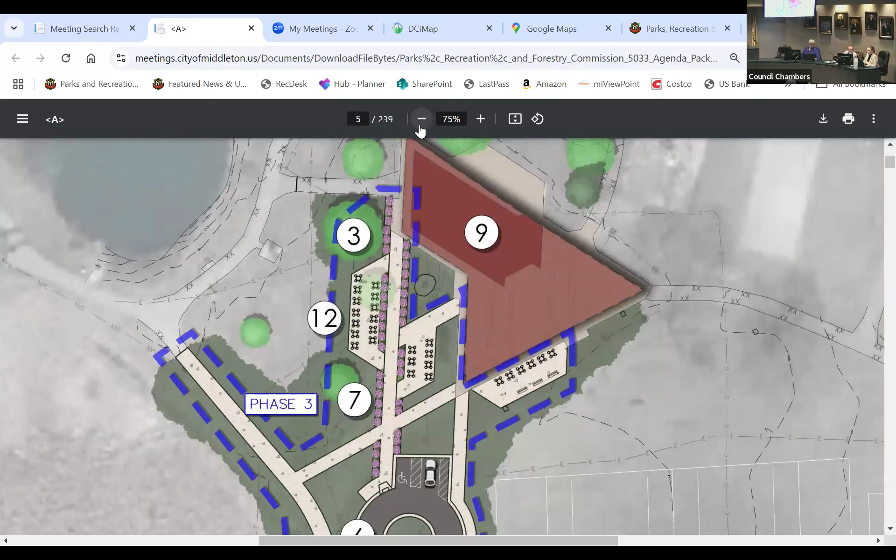And the timeline for this project, we can go through as well. So Rettler has been going and doing surveying and several studies and assessments on this site—I should bring this up for you guys to look at while we're going here—but they have reviewed and been assessing this entire site in the outlined area, which they will go over a little bit further. That's been taking place over the last few months to gather data.

We've also just opened up a public input form online. I hope some of you have seen that. That input form is going to be open until November 11th. Once all the data is gathered, I will send it out to the Park and Rec Board before our next meeting, along with any adjustments to the concept plan you guys are looking at tonight. But tonight is mostly presentation, initial review, and any feedback to Rettler and staff for direction we may want to go with this site.

It's broken up into three phases, which Lance will go through. We do have funds allocated in 2025 for tennis court reconstruction for that phase of the project, so we're planning on reconstructing those in 2025. The other pieces would be in future years when money is allocated to those phases of the project. So Lance can take it from here and run through this for you.

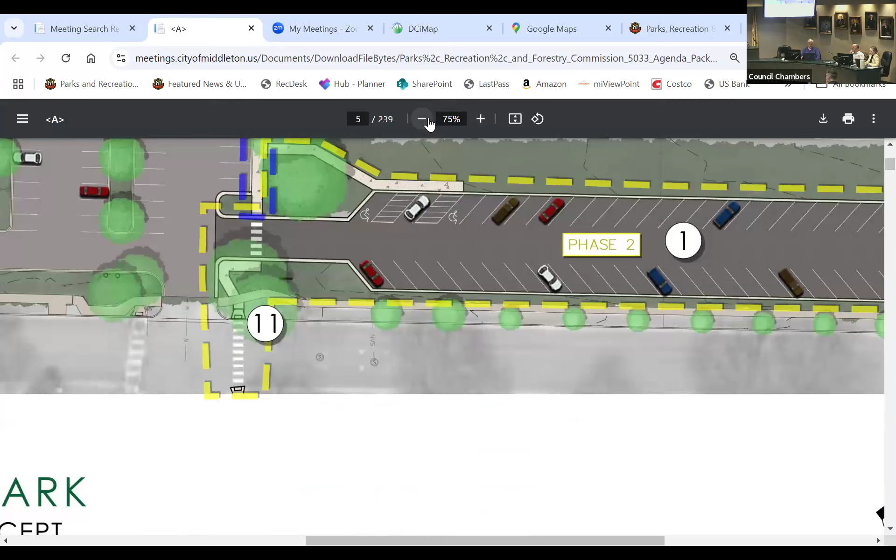I kind of wanted to know what the general thoughts were from over here about that extra parking space, because it sounds like what's already there isn't being used, but that corner is causing contention. I'm also not sure if that full field is being utilized as a rugby field. I don't think we have any rec rugby, so I don't know if it's the biggest concern to preserve that, but again, it doesn't sound like all of this is being used here.

We don't currently have enough space, the field is not big enough for rugby at this location. It might have been in previous years. I know there's tree plantings and that, but right now what we rent it out for is rec soccer and flag football heavily. We rent it out for other uses, but those are kind of our two main ones we want to be concerned with for field dimensions.

The flag football is kind of the bigger one, because when we do have soccer, they kind of just use it as an open field for skills and drills in this location. But we could look at that, we don't have any soccer nets out, it's more of a green space opening. If we do need to or want to look at having this field be utilized for something else, I can get the dimensions of what this would be, just so we can note that.

And then also, if in the future we need to look at any rugby usage—in my two years here, we haven't had anybody come forward with interest in rugby, but that doesn't mean it's not an interest in the community. We have our master plan coming up, where we'll want input like that if we want to see a rugby field in the future.

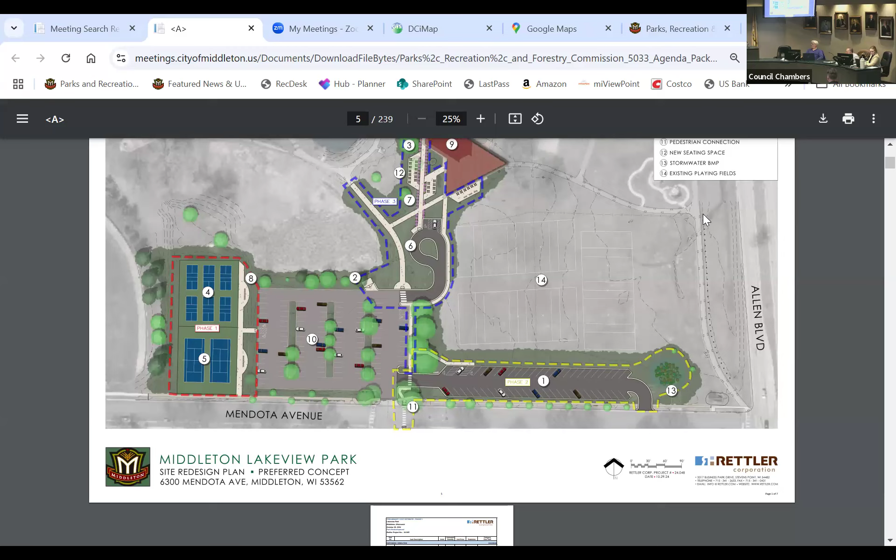All right, on to agenda item number three then. So we're going to talk about the preliminary plat for development for Veridian Homes off of High Street, or High Road. So Kylie, I'll let you kick us off with this one.

Yes, thank you. Oh, yes, you're welcome, thank you. The drive—no problem, sure. Yeah, you can set it right there. And then I'll let you guys share your screen in a moment. Okay. You're just nice. Okay, so the—

The Ziegler development here: Veridian Homes has submitted their preliminary plat for the Ziegler property development project. The Ziegler property is located between Graber Pond and Pheasant Branch Road, spanning 85 acres of land.

The proposed—we need to leave the door open. Sorry, they just shut the door. Oh, there is a door open over here though. Oh yeah, I didn't catch that. Normally this one's closed, but that's okay. Okay, sorry, sorry. No, Kylie, that's okay, that is an important matter.

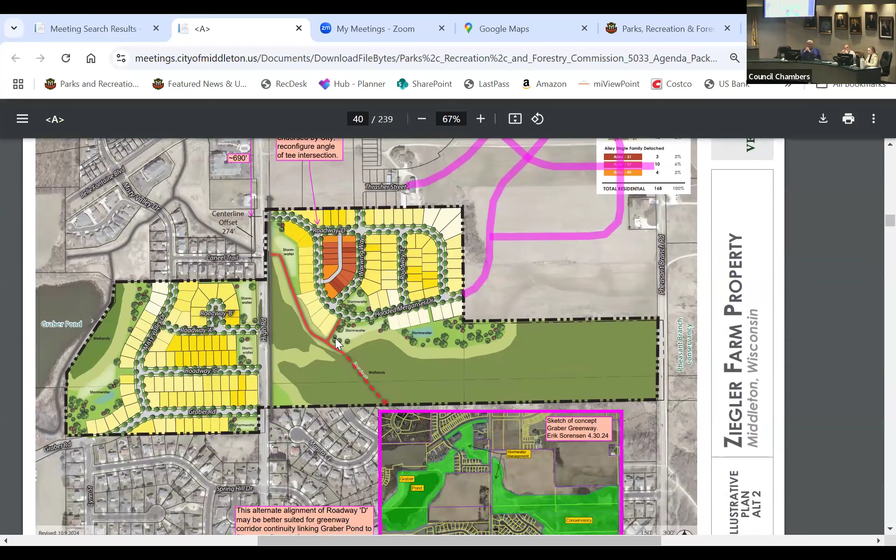So, did you guys need to look at a different map on there too? I'm just trying to look at, what is this map - the alternate plan, illustrative plan - that next to the park thing, trying to line them up. Okay, got it.

So there is coverage to this development with the surrounding parks. But I think a big shout out is that High Road runs through this development, and High Road is something that we don't always consider a safe walkable space across, a very busy road depending on the speed of traffic. So on the east end, there are really only 2 mini parks that provide a 10-minute walkability, versus on the west, without crossing High Road, you have 3 neighborhood parks and a mini park. So that's just something I'd like to note, that High Road is a barrier for people, and that walkability does decrease.

And then noting what's in each of these parks. These two parks have not been developed yet. That is on our plan for next year to develop. Those are brand new park spaces, so the amenities haven't been selected.

But this is Pheasant Branch Ridge Park. We have a playground and a green space. And then in this park here, we have, or wait, no, not a soccer field, a baseball field and a shelter and a playground, and green space as well.

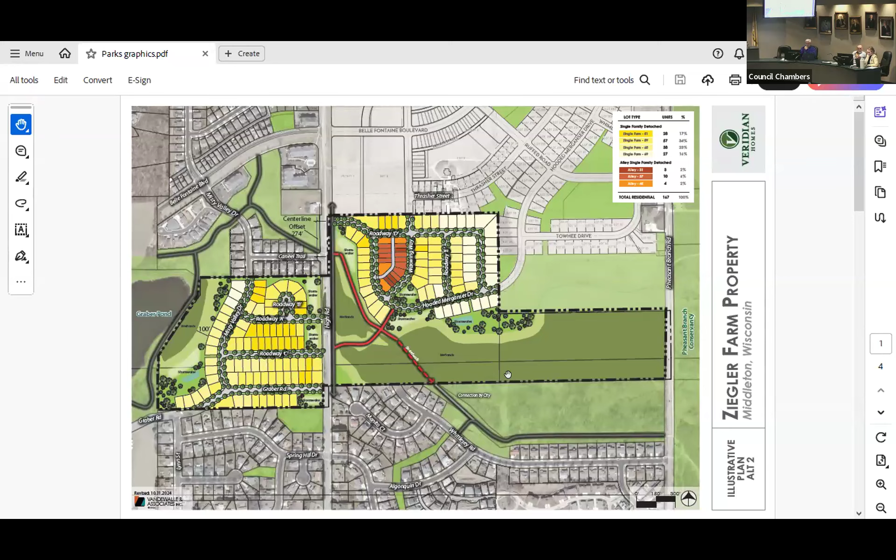Appreciate that. Let me just see if I can get this — if I can share my screen here. How do I? It says I'm sharing through Zoom. You have to go back to Zoom and the screens. I'm not sure, it's still showing your screen, Kylie. Yeah, I'm trying to figure it out. Click on the Zoom tab. Share screen. Let me see it. I'm not sure why it's not sharing. I don't know, I thought I saw it before. Yeah, I'm sharing on my end. Otherwise we can go. When I first opened this up, it was like Brian's screen thing.

So tonight, just to touch on a couple of brief things: in the packet in front of you is the current working draft of the master plan on the first page, picking up comments along the way. So some road configuration changes from the initial submittal, some trail configuration changes from the initial submittal, as well as refinements that are fairly critical as it relates to the parks and open space.

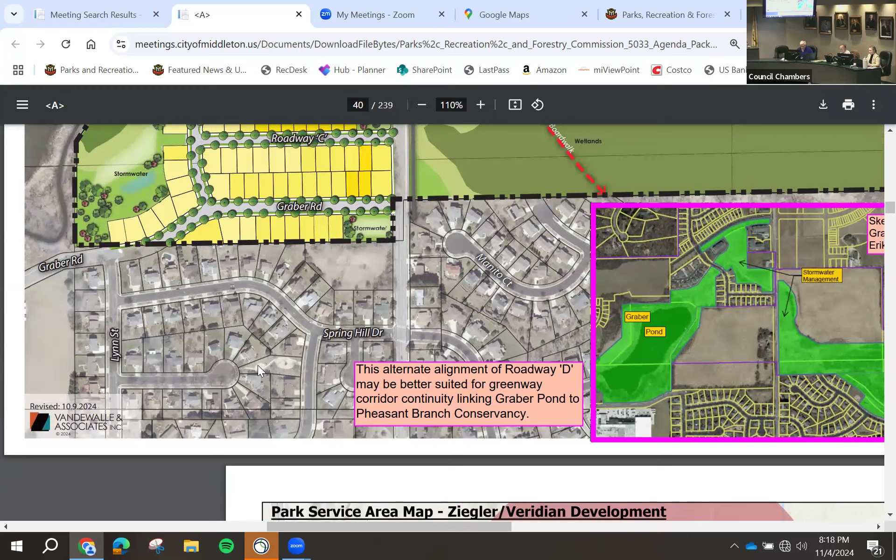And then looking at the other park that services this neighborhood, Hawk Ridge, there's a play area for 2 to maybe 6 years old for play equipment, and then a sandbox area, but no real open green space.

I think it's really important for all these residents that we take a look at having an active space where somebody wants to go throw a baseball or kick a soccer ball or anything like that. So this area over here, with us already having frontage, we know this could be a really good site for connectivity to our trails.

We were looking at right now, it is pretty flat with it being farmed land, but there is a drop off into that park that would have to be regraded to make the park work. I know they showed regrading what works for the house, and something developers will always say is that there isn't space for a park, but there is space. There's always space for a park.

It depends on how you look at the plans, and it's important for us as Parks and Rec to really know that once we discuss and talk about parkland dedication, it's for generations to come, and you can't go back and change that.

To piggyback on Kylie's last comment, a few years ago we kind of got told, for lack of a better term, to create a new playground west of the Beltline out by Greenway Station, because there was no park service area west of the Beltline in the city of Middleton. Part of that is because planning commissions, city councils, parks, recreation, and forestry commissions in the 1990s, 20-some years ago, or early 2000s, did not require any parkland to be dedicated out there. Now we have large apartment buildings with no city-owned green space. We can point fingers, but we can't do much about that.

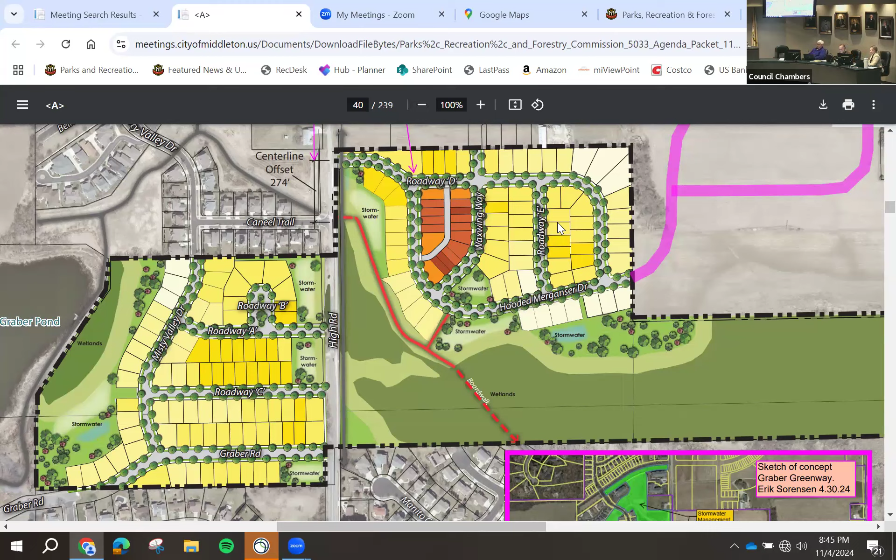Big decisions, right? I can go towards my staff recommendation. Was that the page? Yeah, let's look at that again. I don't know if it helps to relook at it. It was that 1 acre minimum in that area. It potentially could be a different acreage if it has to be graded at a different level. I know there's a lot that goes into a developer site, but taking a look at the park in that area...

...and then initial conditions of it, private stormwater outlet, and also trail connectivity isn't something we talked about, so I just want to go through the staff recommendation.

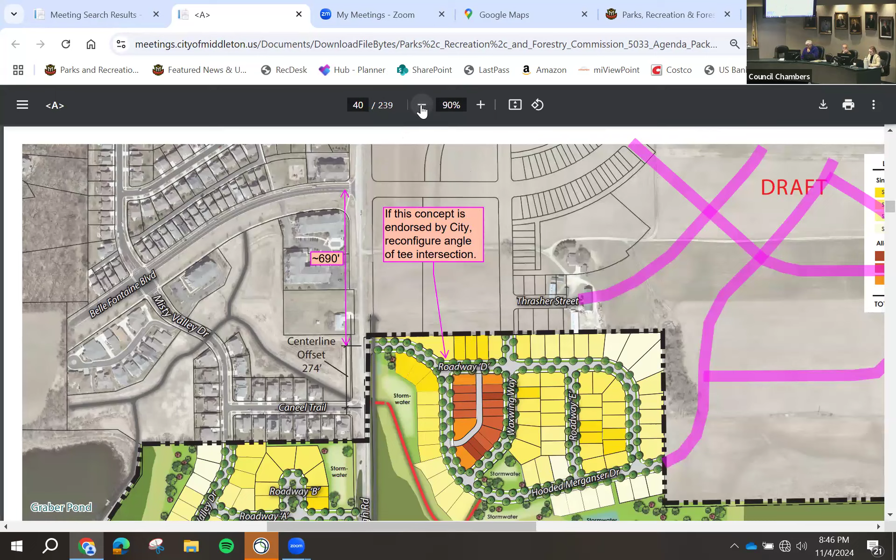They're slowing down, okay, I'm sorry. So for trail connectivity, it would be this trail within here and boardwalk, just alignment really.

The Parks and Rec concern is that there would be a trail connecting. There's a trail that runs all the way to Pheasant Branch through there and behind the park. I have this picture above, which isn't super helpful, but that trail runs through, and we just want to make sure there's a point from this trail that would go all the way. I can bring up a Google map too, that would run to this trail in the Misty Valley area.

If it's aligned in this way, we are open to that. Having a boardwalk section would be needed through the wetland to connect through there, but then also having that connectivity. I know on the printed off sheet, you have that other piece we requested to connect to roadway C, so kind of an X there.

We just want our trail to connect from behind Pheasant Branch Ridge Park up to Misty Valley, to help connect to the future Bell Farms Park as well, and that connectivity to some of the mini or neighborhood parks.

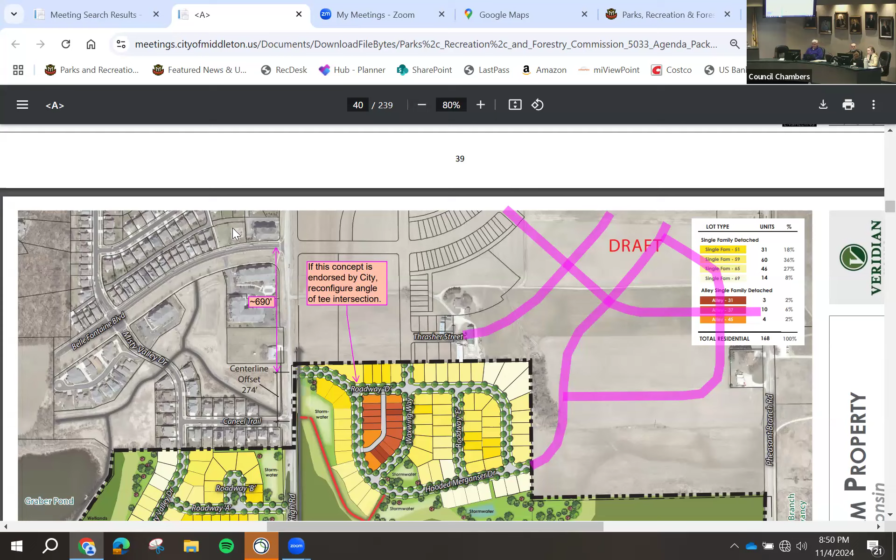This is Misty Valley or Middleton Ridge. I'm looking at the northeast corner lot of Misty and Roadway C. It's a corner lot with less than a 90-degree angle, so that makes it not the nicest lot around, but it would have good exposure.

You'd only be able to put some playground equipment in there with a little running around space, but for little kids that's what you're looking for. Yes.

And I'm looking at this lot right here, Misty and C—north side of C, west of Misty Valley, where one of the homes is. You could take a little bit of the lot above it and reconfigure so the two sides are kind of parallel. It wouldn't be very big.

It would be some park space, something a lot of people could get to easily. It's not really where I would like it, but looking at access—you guys know better than I do since there's no overlay to help—it looks kind of flat, because they made it flat. Yep, that's about where the grade breaks.

That plus enhancing the existing parks. So there's not a ton of contour lines through there.

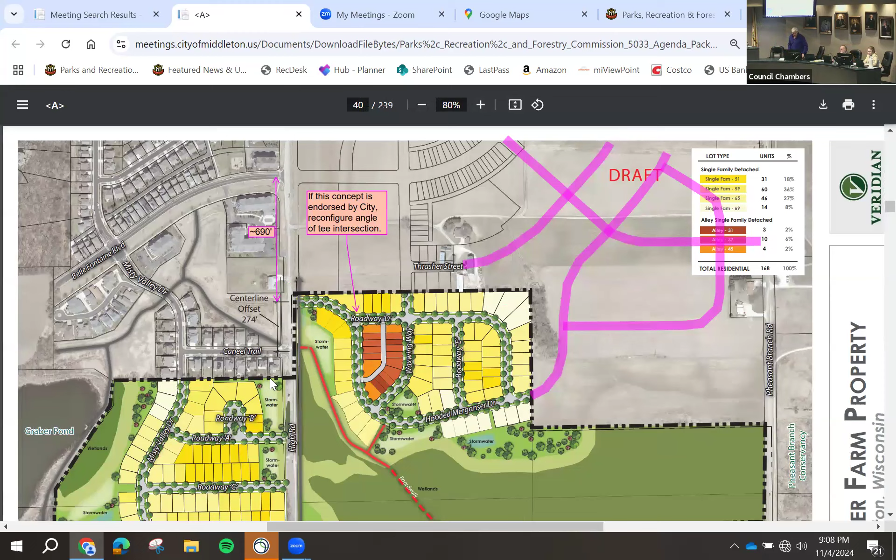We're trying to make as large a pathway as possible for wildlife, because there are fox, deer, and other critters that go back and forth, and we can't ignore them, otherwise we'll have a conflict. We were just trying to provide as much pathway for them as possible.

I had about 12 turkeys in my front yard yesterday morning, so.

Alright, and then campus committee, have you met recently? I missed the last one. I think they were just on a tour. We toured the current city buildings to see the current conditions.

And it's horrifying, thank you for adding that piece in there, Katie. Horrifying things like stairs that aren't up to code, and did you know there are still jail cells in here? We use them for all the voting election stuff, that's where all the election materials are located. I didn't know there were either. Anyway, it really brought to light that we really need to improve stuff.

Did you visit the elevator in this building? No, we didn't go to that side, or did we just see the door of it? Let people know there is one. Yeah, but it only services public works, so it doesn't service the other half of the building. So this building isn't even ADA compliant. No, it's not. It's also not attractive.